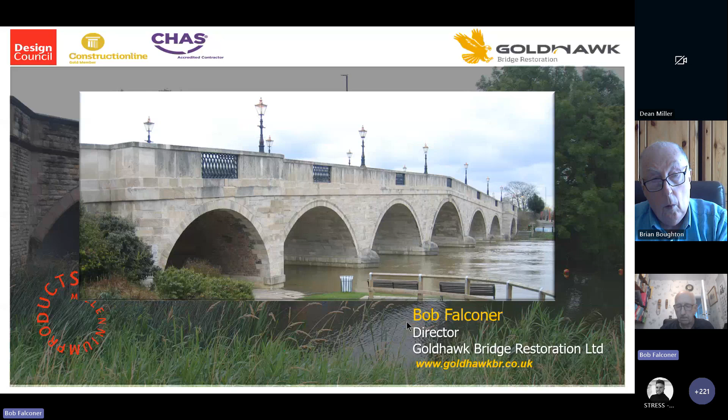Masonry arches, everybody seems to like them. They appear in paintings, they're aesthetically acceptable. A lot of them have never had any maintenance in their life, and they're still standing, durable, tolerant of deformation, built with local labour and local materials. They're part of our heritage. So they must be the ultimate in sustainability. Unlike concrete and steel bridges, they don't require any maintenance, and I think they should be preserved.

This is one of the first bridges we strengthened in 1997. You can see the MARS system in the bridge there, and it's still the same today, no maintenance, hasn't had any work done on it. This is another one - we were in Chelmsford fairly recently and took a picture of this. This is a viaduct that was done in the year 2000 using the MARS system, and again, it hasn't been touched, and it's still as good today as when it was first installed.

A little bit of background. The MARS system has been installed for over 26 years now, and we haven't had any problems. But Goldhawk itself was originally allied to Helifix. We started with Helifix as a partner, and business was good. But Helifix were taken over. We called ourselves Goldhawk because we had a meeting in the pub in Goldhawk Road, and that led to the name of the company.

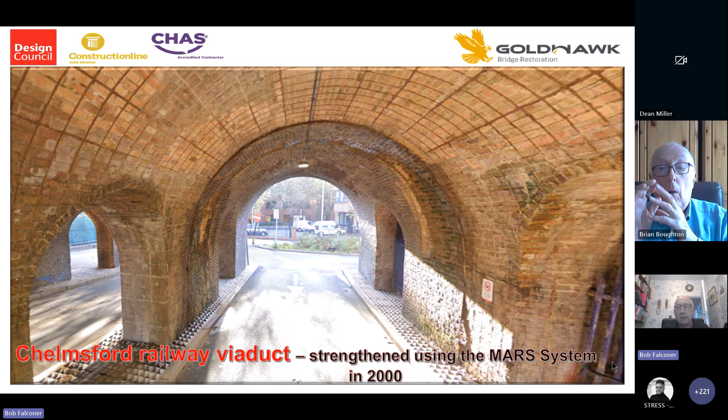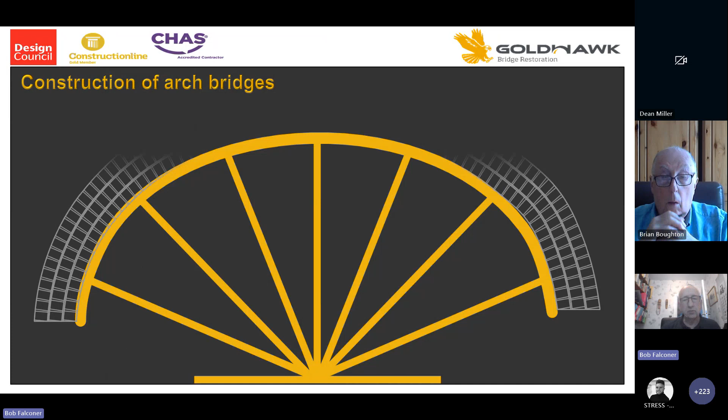Then after that happens, you put the fill over, which increases the compression in the barrel and builds your spandrel walls. So when the centering is removed, each ring goes into compression, but that only works for what we call rowlock construction, which is shown there. Bonded construction is slightly different and behaves differently.

Stone barrels, or ashlar or whatever, behave differently again - they don't exhibit ring separation the same way. Random rubble barrels are a different kettle of fish altogether. So the assessment codes treat all types of construction the same, and I do think a bit more research needs to be done on how the different types of barrel respond.

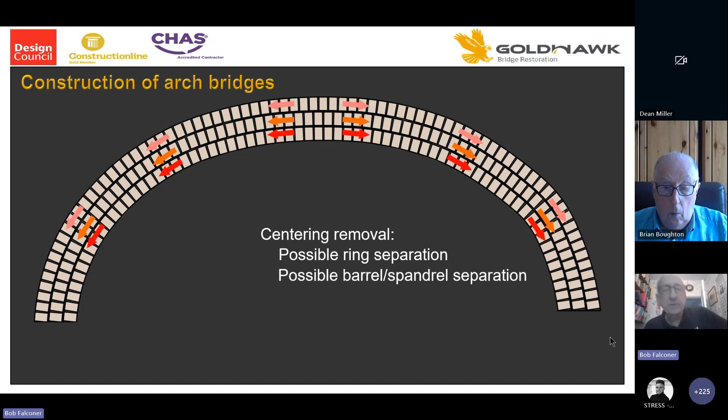A lot of academics will try to tell you that masonry arch bridges are 3D structures and should be analysed as such, but they actually rarely act as 3D structures. They comprise elements that tend to act against each other. You've got your spandrel parapet walls - they've got a stiff vertical plane, but they lack stiffness in the lateral plane.

The barrel itself acts like a jelly mold in the horizontal plane as loads go over it, and in 90% of cases we see a crack going around the barrel. It will depend on whether the spandrels have been thickened as they go down, as to the position of the crack. 90% of the time we see that.

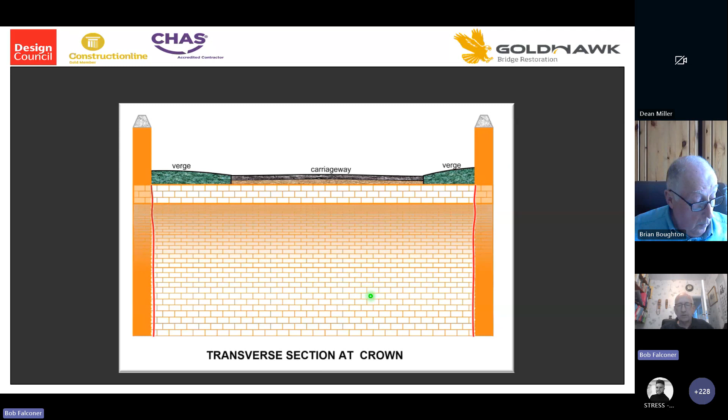The fill and the traffic loading provide horizontal lateral thrust against the spandrel walls, and you get cases where these push out under the wall. So it's the sort of competing elements within the same structure, and that's why 90% of the time we see these cracks.

This is a bridge we're doing in India at the moment, in the Gondal region - Sarda Bridge. You can see it's a beautiful bridge, but the parapet walls have got no real stiffness in them, and very low spandrel walls, and this arch is fairly flexible. It moves up and down, so only lightweight traffic uses the bridge at the moment. The spandrels can move with the barrel, so you don't get cracking in the barrel as normal. But that's sort of fairly unusual.

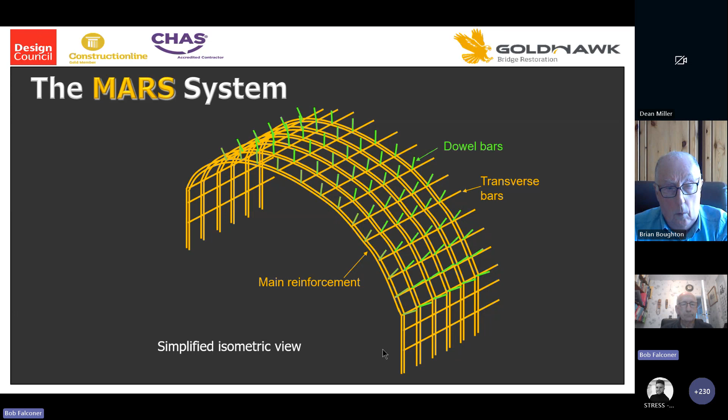This is the Mars system. We stick that into the underside of the bridge. We don't need to work from the top of the bridge or close the road or anything like that - we stick the MARS system into the underside of the bridge. This is what it looks like as an installation.

The circumferential bars around the barrel strengthen the barrel, and the transverse bars hold the parapet and the spandrel walls together, so they're effectively in tension. We tend to have a bar at right angles just to stop overturning of the parapet - sort of belt and braces. So that's the Mars system as it looks.

I should say at this point that I just don't believe in inserting steel bars into masonry. The Mars system isn't really like that - this is supposed to be a solution to ring separation.

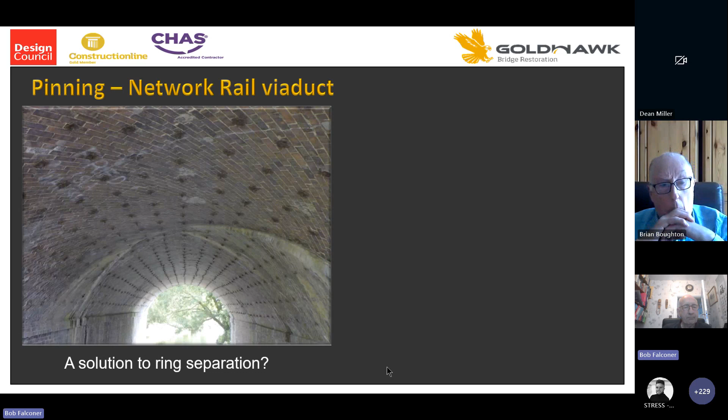I sometimes wonder about ring separation because, again, I've had experience where you bang the soffit with a metal hammer - some people will say oh yeah, there's ring separation there, other people say no, I don't think so. So it's a bit of a black art, I think, finding out where the ring separation is.

But in masonry arches, as the masonry moves, you get micro cracking around large bars, and in this case some of them were dropping out. They don't prevent cracking in any shape or form - they still allow cracking to take place. It's just not a good detail at all, as far as I can see.

This is a bridge that we've been asked to strengthen - another case where large diameter bars have been put into masonry, and again in this case all it's done is exacerbate other cracks. It's very difficult to drill them all the way through the barrel accurately, but in this case that's what it needed. So these bars have really made the situation worse, if you like.

We only use 6mm bars. In fact, using HeliBars, the effective diameter is only about 4mm, so they've still got that flexibility you need in masonry bridges. We put them in what we call Marflex, which always remains slightly flexible. In some cases we use 8mm bars - I'll come to that later, but I think that's the maximum you can use in a masonry bridge.

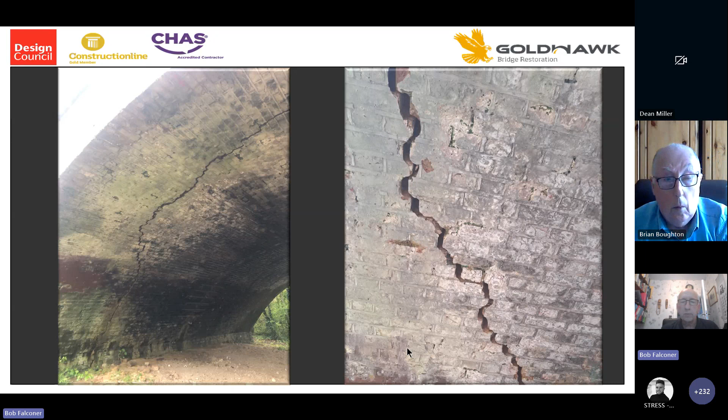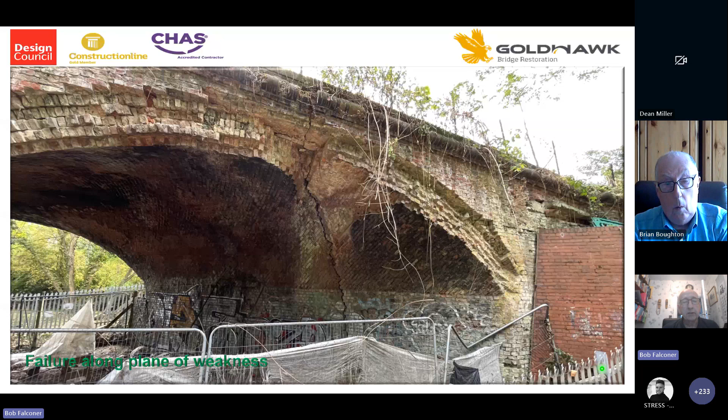So, let's get to the theory of how the Mars system works. The Transport Research Laboratory tested a number of redundant masonry bridges, giving a quantitative illustration of how masonry bridges perform.

As opposed to laboratory models, I'm not a great believer in laboratory models, to be honest.

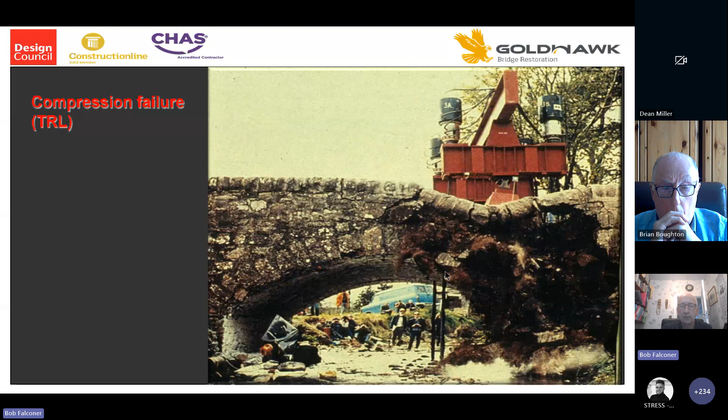This one shows the common four-hinge method of failure, with a hinge forming there, and so on. There's another example done on a sort of rubble bridge, and rubble bridges tend to fail in compression. So those are the two different types of failure for masonry bridges.

I've built a number of finite element models. The package at the university was only elastic, so we'd build the model, take away the elements that were overstressed, and rerun it until we got equilibrium. I've done well over 100 finite element models, and that just shows you where the hinges are going to occur.

So we get to the Mars system — how does that work? We have an arch barrel. As we increase the load, a hinge forms usually under the load. As we increase the load further, another hinge occurs at D. Increase it further, a hinge acts at B. And then, increasing further still, you get four hinges and the arch collapses — so it's a four-hinge mechanism collapse.

So what we do is strengthen the arch barrel at C, say, by putting reinforcement in there — that stops that hinge occurring. If you stop that hinge, you stop the hinge at D, you stop the hinge at B, you stop the hinge at A. You'll never stop them completely, since it will still eventually fail, but at a much higher load. That's how the Mars system works.

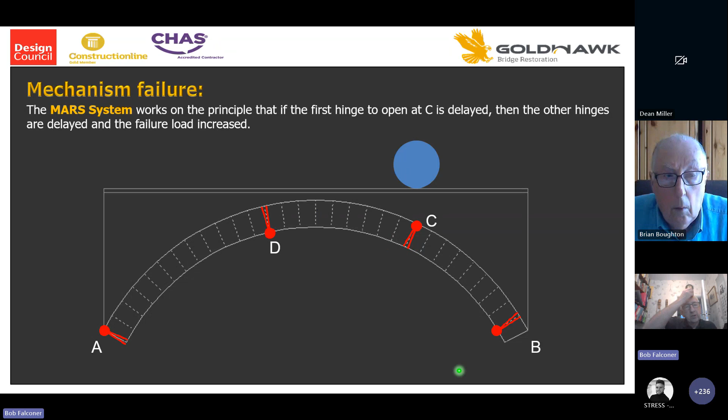We delay the hinge at C, requiring a higher load to form it there, and then the other hinges don't form — that's how the Mars system works.

The only problem is we don't know where these hinges are going to occur. It depends on the direction of the load, the profile, etc. You can only work it out by calculation.

So what we do is put reinforcement in around the whole of the barrel to cover any possible position for this hinge at C. The problem is, if we just put bars in the bottom ring, we strengthen that ring compared to the others, and a stiffer ring will attract all the load. In some cases you can actually weaken the bridge just by putting in a single ring, because the bottom ring might buckle under the increasing thrust.

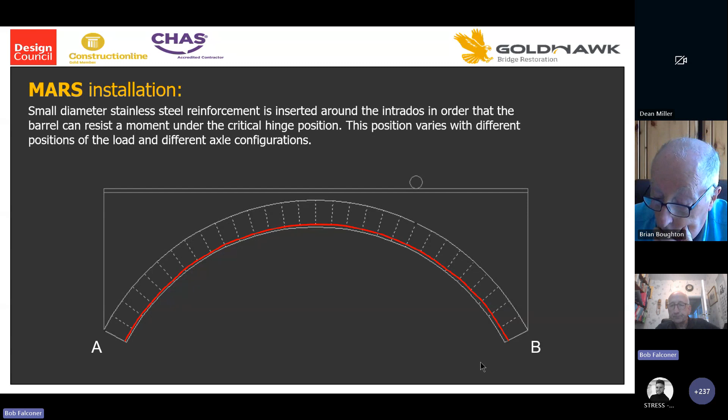So we put in radial pins, which tie all the rings together, and also tie the circumferential reinforcement to the barrel. The pins don't penetrate the barrel, so any services in the road aren't affected, and we can work from underneath the barrel.

That's the cross section of a typical installation — Helibars, radial pins, these are the circumferential bars, this is a transverse bar, and the Marflex, which has been developed especially for us.

It's amazing stuff — it sticks to anything. In load tests we've done, it's the brickwork around the Marflex that fails, not the bond. So it can be applied in damp or dry conditions and it still works exactly the same.

It's a derivative of a material that's been used for 100 years in bridge expansion joints, so it's salt proof — and that's important, because stainless steel is affected by salt. The chromium oxide layer of the stainless steel is affected by salt, and you could get rusting if you expose it to salt water that percolates through road bridges from road salts, etc.

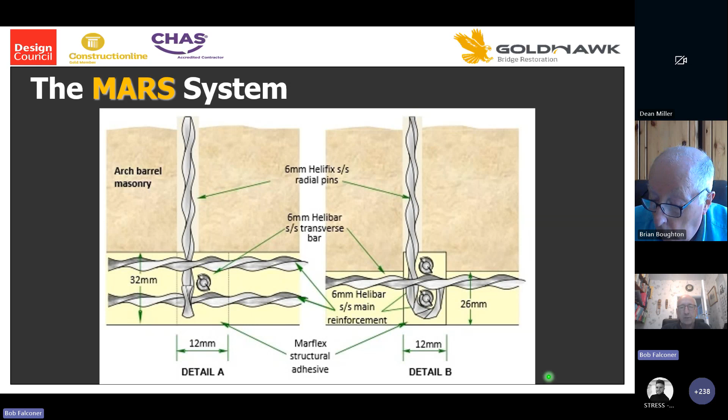So that's how the Mars system works.

The ASARC program, and the Mars program is based on the ASARC program — exactly the same — was tested by ARP independently, and found that of all the methods and programs available, it was the most accurate, best fit to the test data of any method used. That test data came from the actual bridges tested by TRL.

This is a test we did at TRL, an independent test carried out at the Transport Research Laboratory. It was a 5-meter span arch with 3 rings, and they put sand between the rings to simulate ring separation.

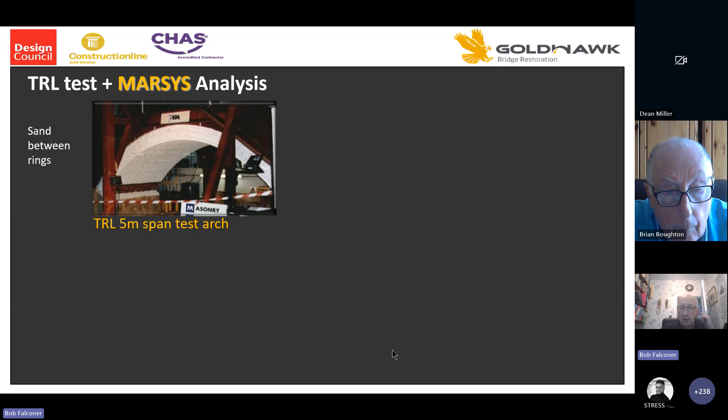This was the test at failure, showing the MARS system in the bridge and the failure test. The unreinforced bridge, with ring separation, took 200 kilonewtons. I worked out using MARSYS that it would take 190, giving us a 7.5 ton weight restriction for a bridge like that, a 5-meter span bridge.

For the test, they tested the unreinforced barrel to failure, but not to destruction, only to maximum load. So we jacked it back into shape and put in just a layer in the inner ring, with surface steel only, and got an increase in strength of about 30-odd percent. That was just to see what one ring of reinforcement would do.

Then we rebuilt the bridge and put in the full MARS system. I predicted this in front of an audience of 60 bridge engineers at Transport Research Laboratory, making sure there was no fiddling. I sat down on my laptop using MARSYS and predicted it would fail at 349 kilonewtons. I designed enough reinforcement to take it up to 40 tons. We could have put in more reinforcement and got higher failure loads, but we wanted to see how accurate the software was.

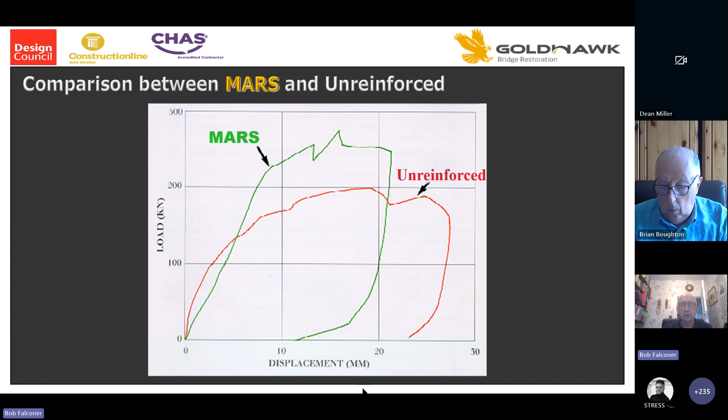All the students at the university, all my master's students, were given dissertations on masonry bridges, and there was no shortage of them coming forward to do this. We had a rig in the lab with glass sides, so we could plot the original arch and then plot how it was deforming. We looked at various forms of construction, various types of fill, etc. I don't really believe laboratory models can accurately represent 100-year-old bridges, but they're useful in comparing different properties and improving what works and what doesn't.

So that's a bit more experience of masonry bridges. We've tested masonry bridges, and we've tested lots of bridges with weighbridge testing vehicles. We used to use these, though we don't do it as much now, with cast iron weights on the back, so you know exactly what the wheel load or axle load is on the vehicle. We can go from tare up to, say, 25% greater than the design load using these vehicles.

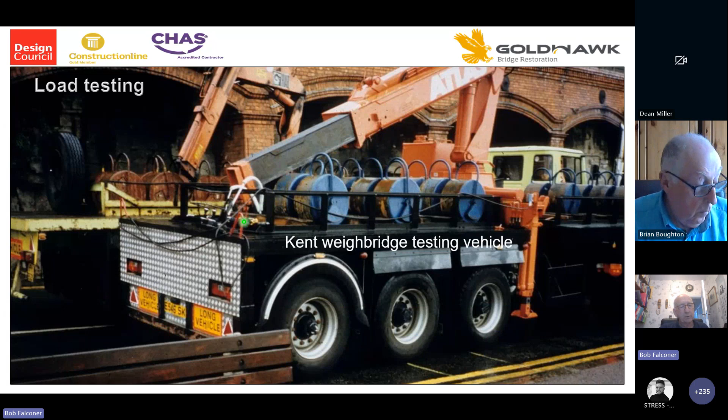We use vibrating wire gauges, and this was really just to look at dispersion and see what the effective width was. It actually showed that the codes were pretty good.

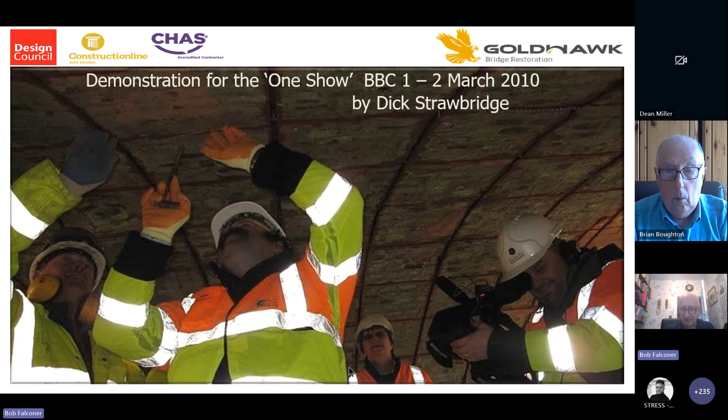The MARS system was demonstrated on The One Show in 2010. Dick Strawbridge came down to a job we were doing, and it was actually performed by the engineer for Gloucestershire. She recommended it to the BBC, and he came down and demonstrated it for television. So that's our claim to fame.

That's us standing there - this is me. I'm the good-looking one on Dick's left.

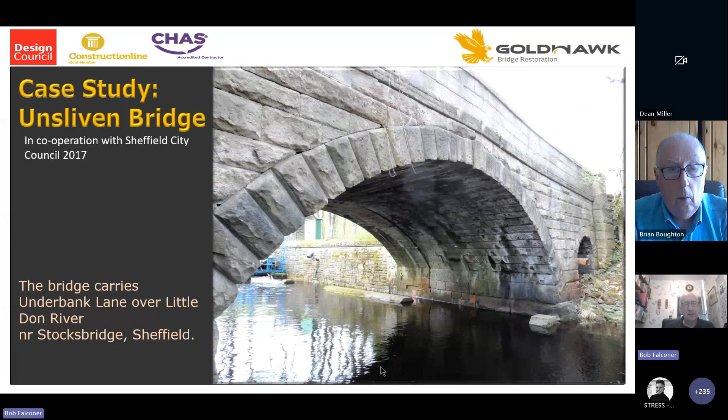So we get to case studies. This is one I did in Sheffield in 2017. It was built in three different sections - there's the original section, then it was extended on either side, widening the sections.

They were going to knock it down and put a concrete monstrosity in its place, which is not environmentally friendly or anything like that. So the locals were up in arms about this and wanted to keep the bridge.

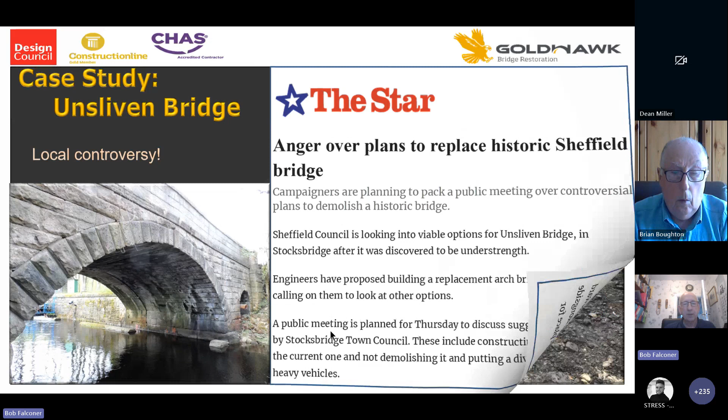So we were called in to preserve the bridge. When we got there, the contractor had already taken the fill off the bridge, so that's what it looked like - three sections, with a middle section being the original, and the extensions either side. You can see how rough the outside was, while the inside, the intrados of the bridge, was nice and neat.

But the extrados is rough. You can see if you wanted to core the barrel to find out the thickness, if you take a core through the bit that sticks out, you get a completely different value than if you take a core through the bit that doesn't stick out. So you get two different thicknesses. With stone barrels, you need to be very careful when you're taking cores.

I think you should never take the thickness at the elevation as the thickness of the barrel, because very often they either thickened them at the elevation and didn't put as much material in the actual barrel that's carrying the road, or they tried to make it look more elegant and make it thicker on the road.

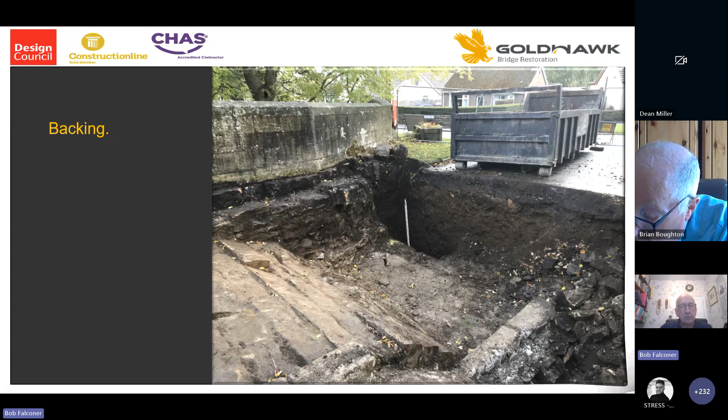And this is, I think, a big no-no. You never put a concrete slab over a bridge. We've had cases - we remember one bridge in London where a slab had been put over the bridge and was acting as a seesaw. So the wheel came on one side, the other side came up, etc. A bit daft. In this case, instead of having a separate axle load there and an axle load there, etc.

It's concentrating the whole bogie load at the crown of the arch, there's no dispersion down from the arch barrel from the slab. So there's no dispersion away. It's concentrating the load on the slab, and it always seems to be a bit of a daft idea to me. But anyway, that's the slabs.

This is - you can see the other side. The fill is completely different. It's just a load of rocks, etc. So fill - it's always difficult to predict the properties of fill.

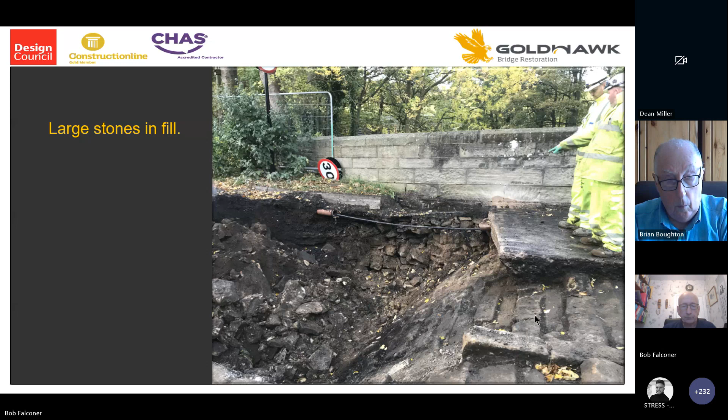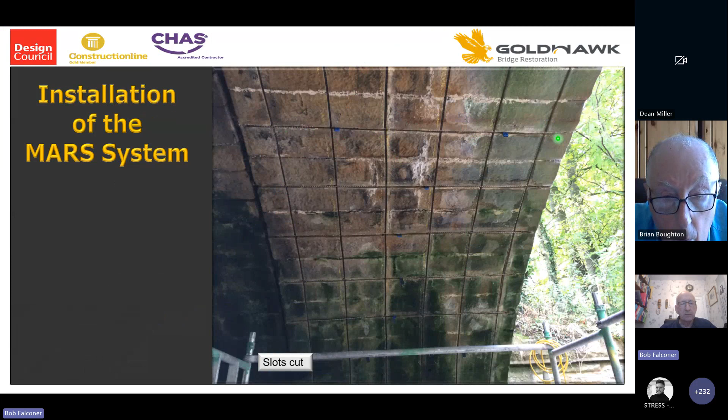This is our access to the bridge. You can see it's fairly sophisticated, and that's the working platform. That's the slots being cut to put the MARS system in. The Marflex isn't in place yet, but the bars seem to be in place there. And that's the MARS system in place.

So you can see it's very difficult to actually see what we've done - it makes it a neat job. I'm not a believer in taking the bars between different sections, because they've got different stiffnesses and behave differently, and I like to maintain the original response of the bridge to allow it to move in the way it was originally built.

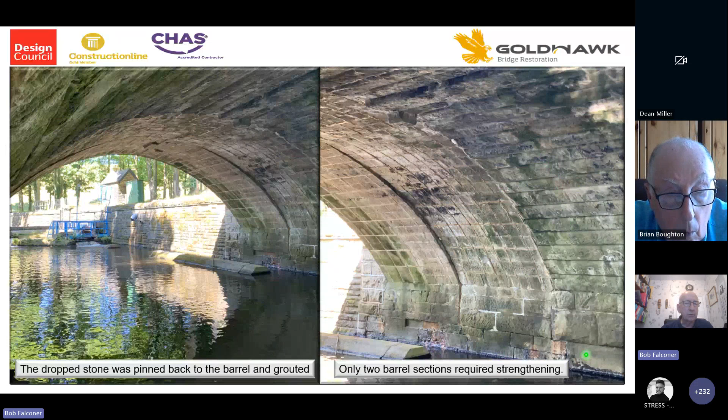This section doesn't need strengthening, so the end section didn't need strengthening. This is the MARS system in the bridge - we didn't need to put it in that section. The middle section was the section that needed the most reinforcement, and we only put in nominal reinforcement. This is a nominal system there.

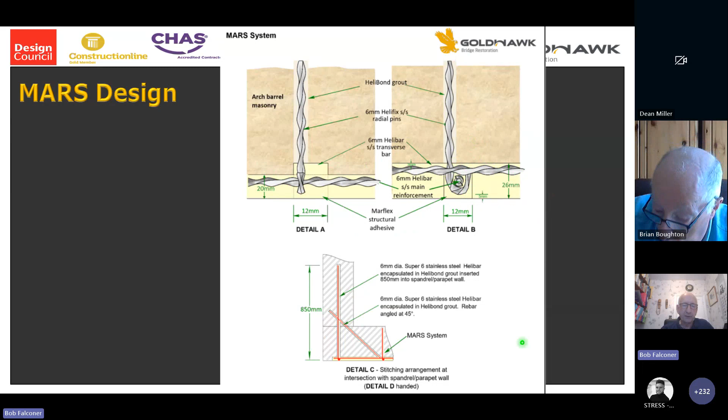It's just one bar transversely and one bar circumferentially at 450 centres. So that's our system in that bridge.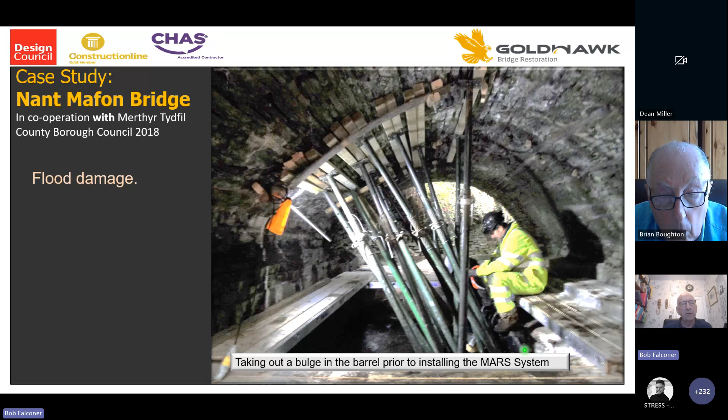This is another bridge in South Wales. It suffered from serious flood damage - it was buckled, in poor state. So we pushed, as we did in the laboratory for our test bridge, we pushed the barrel back to maintain its profile.

In order to do that, we had to excavate, which is not really a good idea, but we had to excavate over the barrel. I found a big lump of concrete in there, which was causing the bulge in the barrel. So you never know what you're going to find - you get old pipes, you get boots, you get all sorts of things in the fill, sometimes used as skips, I think, when they were open.

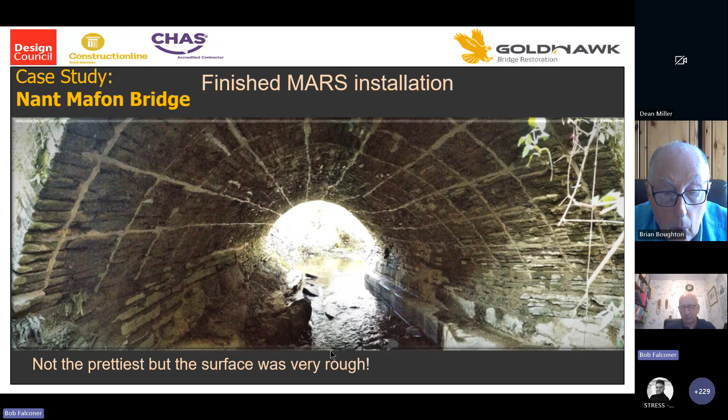And that's the system put in the bridge. It's a way out in the country. It doesn't look very nice, it's not pretty, but it preserved the bridge, which was good.

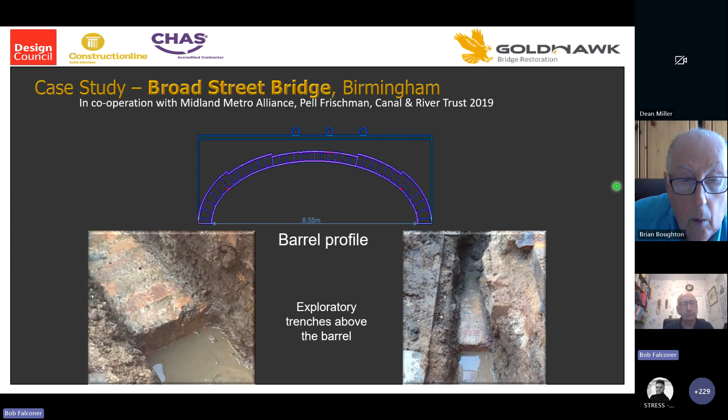There's another bridge that Brunel designed or built, I don't know. It's near Reading on the Great Western Railway, called Briscoe's Bridge, constructed just before he died. So I can say I've designed something that's improved on Brunel's work - feather in my little cap.

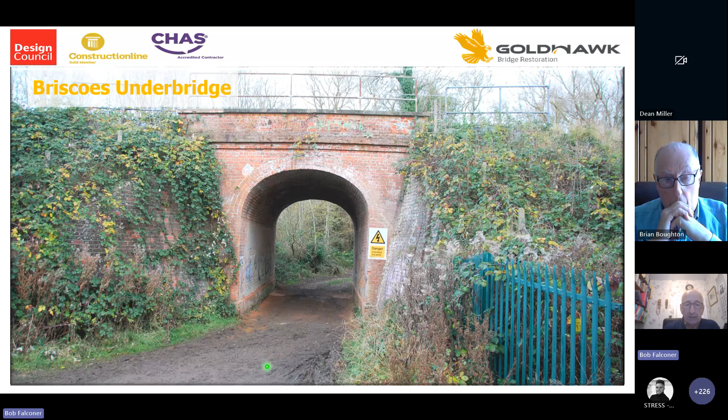I always find it's a good idea to just have a pole, stick it under the bridge when something's going over the top - it gives you a feeling for the response of the bridge. I didn't realise I was quite so bold, to be honest, until I saw that picture, which is a bit of a shock. But with the aggregate trains going over this, you got 10mm deflection.

They were huge trains, and bits were dropping out, and it was quite frightening standing underneath this bridge watching it go up and down. As each bogie went over, it acted perfectly elastically - it went down 10mm, back up, down 10mm, back up as the train moved slowly over the bridge. So it was a very interesting exercise.

The bridge wasn't actually elliptical, it was 3-centered, which are quite common because it's a lot easier to set out a 3-centered arch. You've got a circle there, and then a circle between them.

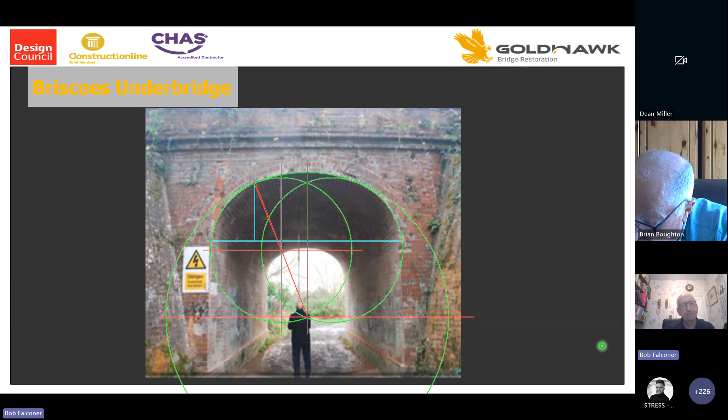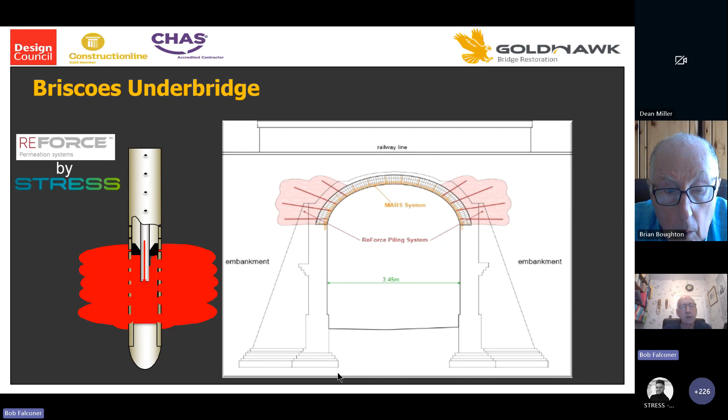So we designed a system - we replaced the backing by putting in, because our sister company Stress does a ReForce system for reinforcing foundations, so that pumps out a very controlled amount of material. We could not afford to let any of the grout go into the ballast supporting the railway line, because they have to keep reballasting, etc., so we couldn't affect the ballast. This gave us a very controlled flow - we knew exactly what we were putting and exactly where we were putting it, and that improved the backing to the arch, to the barrel.

We then inserted our MARS system. Now, propping - normally we don't have propping.

Normally, because I design the temporary condition, I check the strength of the arch for the slots being cut. Since they're only very small slots, transverse slots 12 mil by 26 mil deep, it's just a small loss of mortar. So I normally check that to make sure the bridge doesn't need a weight restriction, or doesn't reduce significantly in capacity, to make it unsafe for us to work there.

But on this bridge, we worked with Arcadis, and they designed the props for us, using soft propping because we don't want hard spots. That's a 25 mil deep rubber pad, and we work between the props. Because of the deflection of the bridge as the train was going over at 11 o'clock every morning, we were quite grateful for the props, to be honest, but we don't normally recommend them.

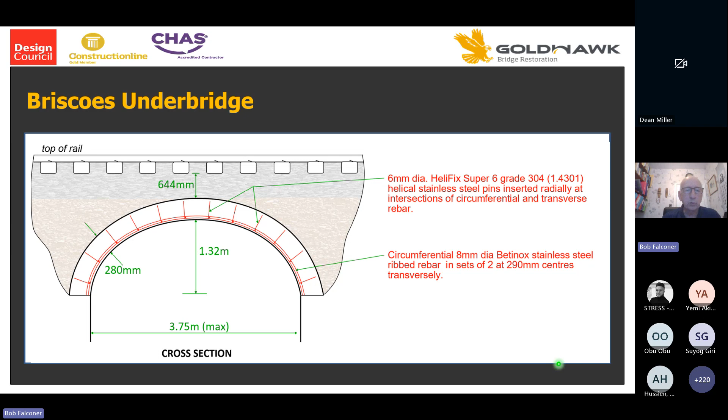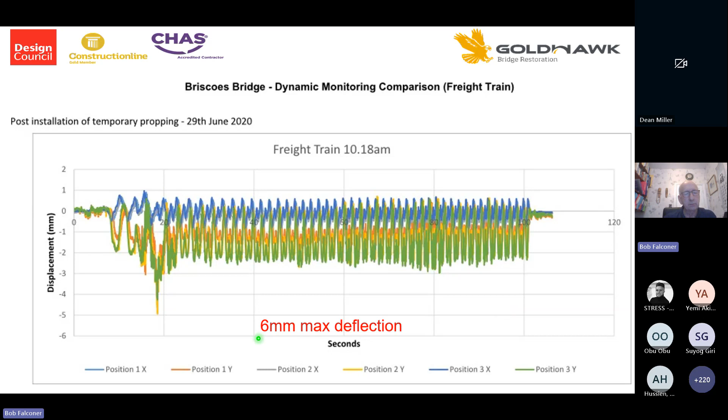When the props were put in, it reduced the deflection from 10 mil to 6 mil, so that was the effect of the props. Then, backing into the arch again, replacing the backing which had fallen away, reduced the deflection to 3.5 mil, which shows you the effect of that.

Then putting in our MARS system - you can see that's the engine going over, and this is the wagons - reduced the deflection to 1.25mm. I think I'd calculated it should be 2.

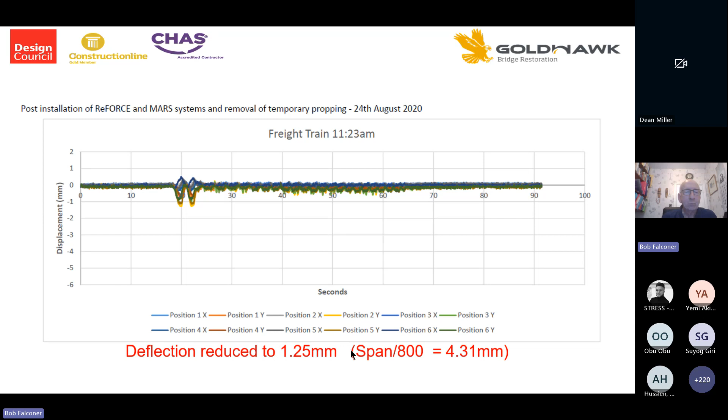Anyway, so I'd calculated that it was going to be about 2 millimeters or something, but we achieved what we wanted in the bridge using the system. This is a system in the bridge, and it gives people confidence that we've strengthened the bridge. It doesn't deflect as much, and it looks good.

So the arch was upgraded from RA5 to RA10, completed the job on time, and they didn't have to close the railway line or anything, because the alternative was to rebuild this bridge, which would have meant closing a very busy railway line. We refurbished the brickwork, redid the brickwork, etc. So the bridge is back to normal.

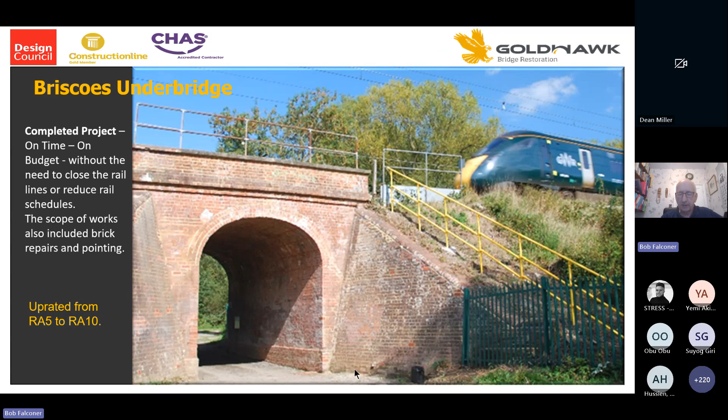Another job we're working on at the moment, we're actually installing our system as we speak. This is in Cardiff. Again, working with Arcadis and Amey and Amco Giffen, same people, but Transport for Wales in this case.

The barrel of the bridge was 700 mil thick. It had a brick layer over the top, so obviously it had all been taken away and the brick layers put in, and lean mix concrete put in under the ballast, or the ballast put over, I should say.

The original assessment took the full width of the bridge, 960 millimeters I think it was, which was not correct, because as we've seen earlier, when you remove the centering, the barrel sinks and it all goes into compression. The brick layer hasn't had a chance to sink because it's been built over the barrel, so there's no compression in that brick layer. So it's not actually doing anything.

So I don't know why I put that in there in the first place. The lean mix was all cracking up because there was water pouring through the barrel, not really being much use whatsoever.

So we put our Mars system in the barrel, again using 8 millimeter bars to improve the stiffness, and that's the system. We've had to recase.

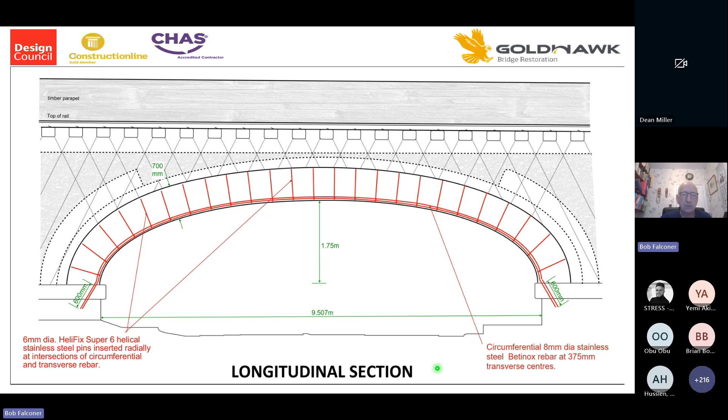I'm just not a fan of recasing masonry bridges because, again, you're putting bricks in that have no stress in them. But we've had to recase some of it, so we're anchoring our bars in there, because you can't anchor it in bricks that don't have any stress in them. And that's what it looks like.

Again, they've designed propping for us, but normally, in this case, I don't think we need it, to be honest, because it's fairly lightweight loading.

Although after we designed the Mars system, Transport for Wales came along and said, actually, we want RA8 because we've got tamper vehicles going over this. So if the tamper vehicles were going at 5 miles an hour, we calculated it could take them, and they were RA8 levels, but we had to upgrade it to RA6, which was good. We don't know what the original was - I think it was RA0 actually - we got to in the end because it was overestimated in the first place.

Another thing, please don't do. There's a lot of standard Network Rail standard details that I don't agree with, but this is the natural crack that goes around the spandrel walls, and these people wanted to stitch it, and all that will do is move the crack from there to there eventually, and it won't do any good whatsoever. So there's a number of Network Rail standard details that I have issue with, I must admit. So please don't do that.

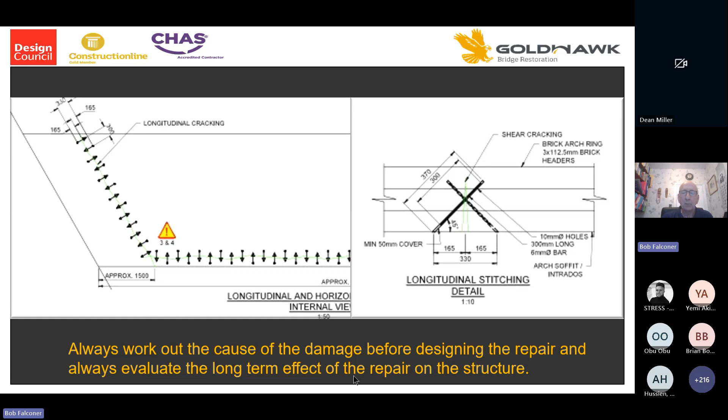I think when you're designing a repair for any structure really, you need to work out the cause of the damage first, what's causing the cracks, etc., before you start thinking about repairs.

This is another beautiful bridge that we did, over the River Nene in Oundle in Northamptonshire. First records in the 14th century, and then it was destroyed by floods, rebuilt, widened, etc. So in that case, we've got lots of different foundation types, lots of different arch types, etc. It comprises 13 spans from 3.5 meters to 6.2 meters, and they wanted a weight restriction from 3 tons to 44 tons and SV100 vehicles.

So we came on site, but in January 2020 there were massive floods, so the whole site was flooded out. You can see the bridge there. There's a backwater that goes up the side of the bridge and completely flooded it. This was taken by one of our guys in an airplane flying over.

As soon as the floods went and we were able to start working, COVID came along, and so we still carried on working. We had very strict site rules. We had air-fed helmets for each of our operatives, and they worked alone. All site rules were really strict - only one person in the canteen at a time, everybody had to have their own cutlery, everything was kept separate, and everybody had to have their own cars to get to site, etc. But we did it.

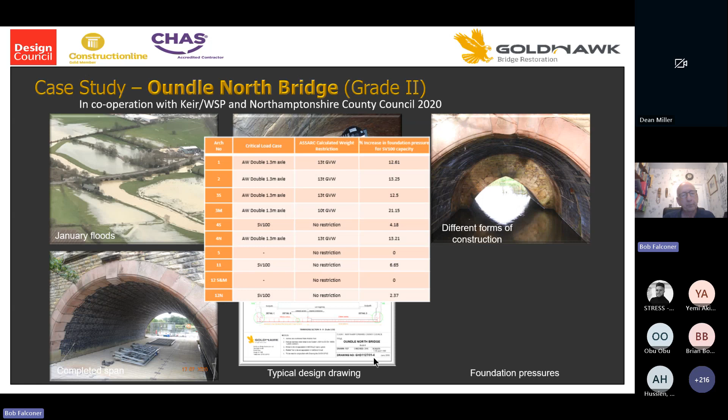When you're upgrading from 3 tons to 44 tons, you need to be aware of the increase in foundation pressures across all the different foundations - there's foundations in the middle of the bridge, south side of the bridge, etc. We reckon that because the foundations have been in place for 100 years and have consolidated the ground underneath, you can increase the foundation loading by 15%, say, and there's no problem. In this case, we had 21% as one of the foundation increases. So we recommend that for principal inspections, you do just have a look at the pier just to see if there's any movement.

So that's the bridge - you can see the Marflex system looks really good in there. We can colour the Marflex to suit the colour of the brickwork, etc., and repaired a lot of the stonework as well. Our guys have done a brilliant job, I think, on that bridge. That's the system in place again, and again it's brand new, so it's very shiny, etc. But that's our system.

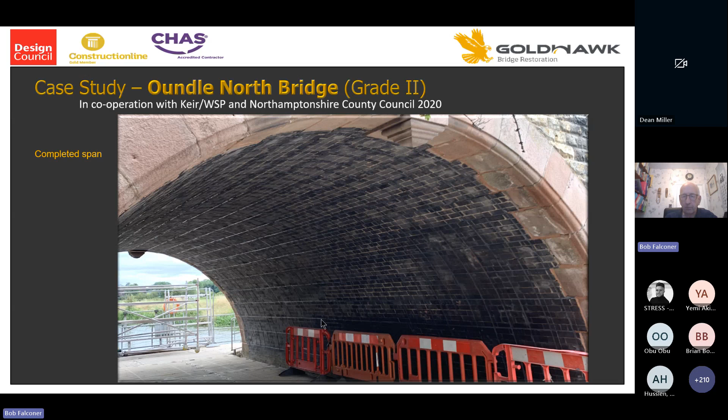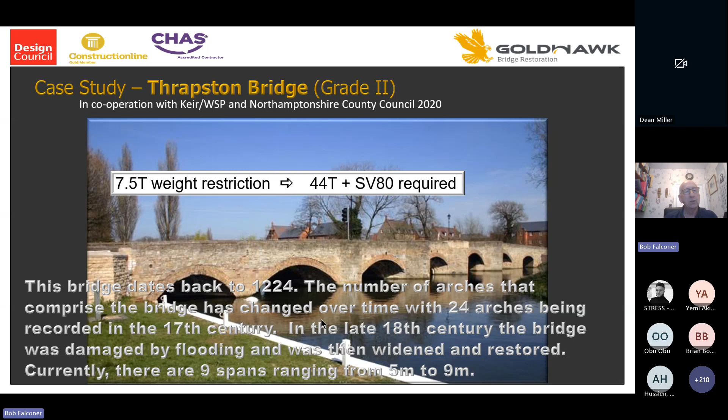This is another bridge we did, Thrapston Bridge, again over the River Nene, same people. Another absolutely fabulous bridge, love to look at it. It dates back to the 13th century, and it started off with 24 spans - now there's only 9 spans, ranging from 5 meters to 9 meters. It had a 7.5 ton weight restriction with single lane working, and again they wanted it upgraded to 44 tons plus SV80.

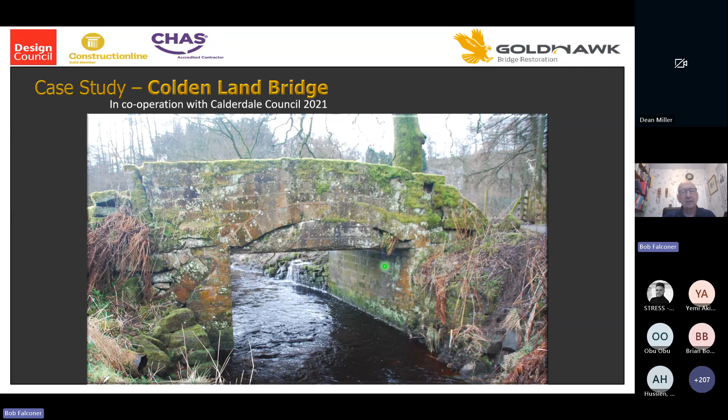Of all these large bridges that we work on, I like working on these little ones just as much. This was a little bridge in Calderdale that had been strengthened by just putting concrete underneath on wrought iron beams, and it was in a terrible state, as you can see.

So the bridge had this support added, and the abutments had also had new abutments added under the arch here. So you can see there's a huge restriction to floodwater, etc., and it was in a bit of a state.

So the idea was to cut away this, but we didn't want to remove these because that would be too much. So the way we looked at the arch, there's the inserted abutment here, and as the barrel deflected, it would come away from the abutment here, and you'd get a pivot point here.

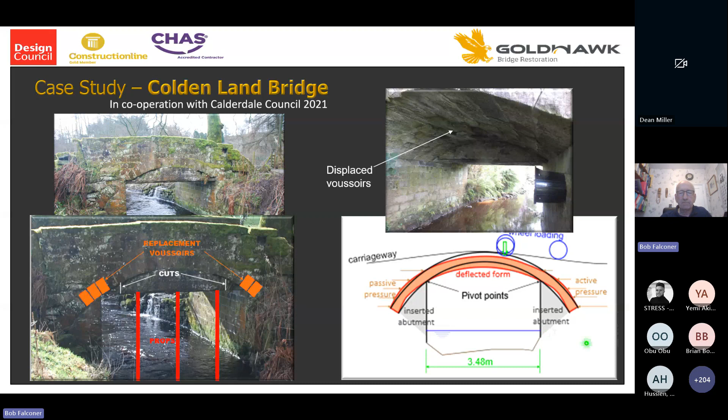So we designed a system where we anchored the barrel to the back of the abutment, took our mast system around the abutment, and made it all as one, if you see what I mean.

And so that's the state of the barrel before we started. It was in a very poor state.

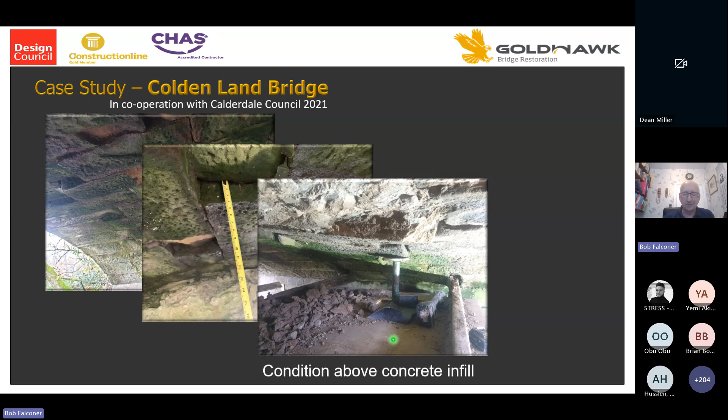You can see a 40mm displacement between the stones, and this was the wrought iron tray that was holding the concrete. You can see why that was put in there, because it was in a terrible state, and the wrought iron was actually corroding, so it was about to fall down anyway.

And there's a big heavy plant just next to the bridge which was using it. So our guys worked their magic, and this is the end result.

You can see the mast system in place, a huge aperture now for floodwater to get through. Because there wasn't much fill over the top of this bridge, they jacked all the stones back up into place, and it's back to normal again, this bridge. So I thought that was a great success for us.

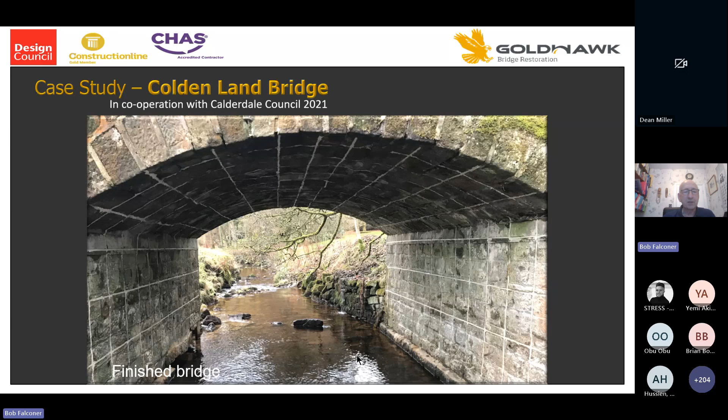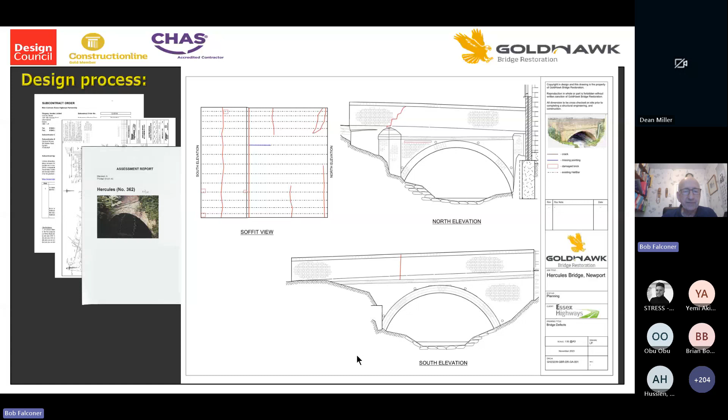Now the design process - as I'm the design guy for the mast system - we get an order normally, then we usually get a few drawings of the bridge, previous assessments if possible, and normally we go out and monitor, mark up the defects for ourselves and check dimensions, etc.

I need lots and lots of photographs because very often I don't get to the bridge. You can see this one - I don't know if you can see it - but this is bonded construction, this barrel. And the other side is rowlock construction, which is bricks on edge.

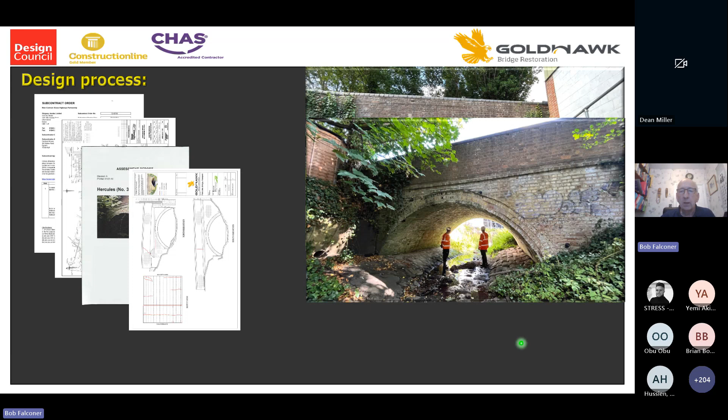you can see that you can get some fairly big lorries on this bridge. So it was all useful information.

The design process is that we need technical approval first, so we come up with an AIP, an approval in principle form, and that gets approved by the technical authority.

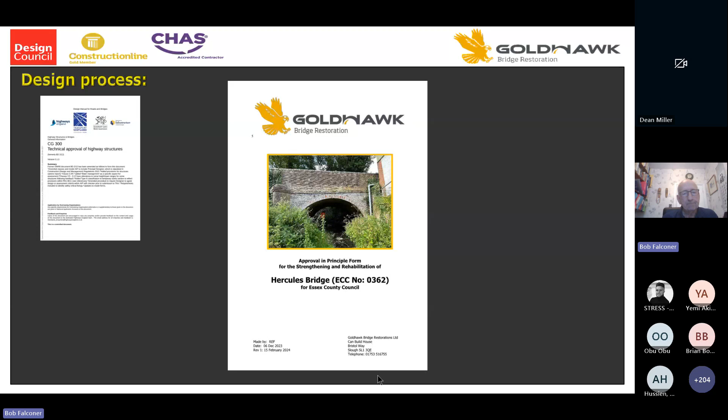Sometimes they come back to us with queries, and then we have to answer them, because it's about deciding on what materials and dimensions to use, and agreeing that between all of us.

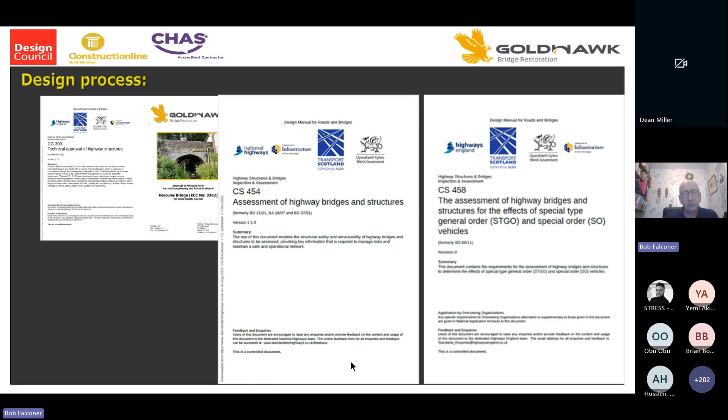Then we design to 454 and 458. 454 is for normal all-assessment live loading, and special vehicle loading is 458. Public roads are supposed to take a minimum of SV80 vehicles, so we have to design for that for most public roads.

We also use CD 376, which is a design code for unreinforced masonry bridges. It's not strictly relevant to us, but there's a lot of good information in there that we tend to use, such as that you shouldn't use LM loading, which is given in the Eurocodes for masonry arches.

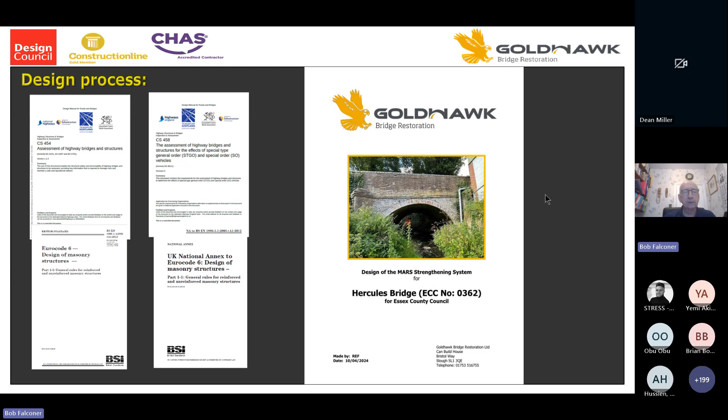So we design to these codes and then design the reinforcement to Eurocode 6, because I think that's about the only design code for reinforcement these days - that's rules for reinforced masonry in structures. I then come up with a design report that goes for approval, and then we agree costs, agree site layout, etc., and go on.

So I use the ASAP program to analyze the bridge for pre-design. That gives profiles, etc., of the arch. Then I use MARS to work out the moment of resistance that we need, and then design the reinforcement to the Eurocode.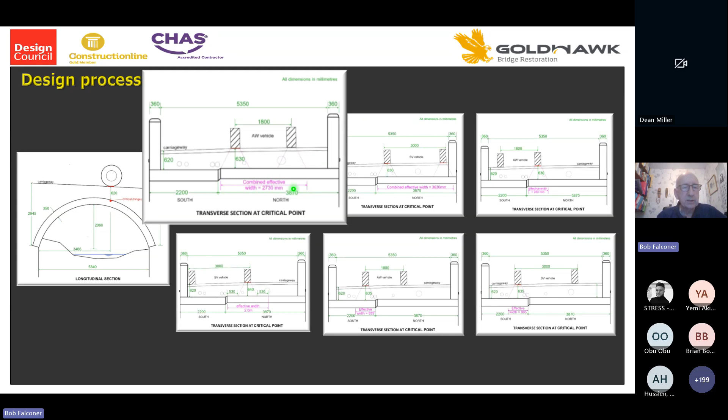Now, in this particular bridge, it was in two halves, so you have to be very careful about your effective width and your loading. For instance, this half could actually take authorized weight vehicles, but if you put it up against the edge of the slab, the vehicle's got to be in the middle of your effective width, so your effective width is that length there - it's not as in the code.

With SV vehicles, again the effective width - they just fit on the slab, and your combined effective width is that amount. But when you load the other slab, you can't get a vehicle on it, so one of the wheels has to go on this slab, and really the wheel has to be in the middle of the effective width. So your effective width really is only the dispersed width of the wheel.

Same with SV vehicles, out of sequence - the effective width there, you can take 2L or something as extra width, so the effective width is 2 meters in this case. The vehicle is straddling one slab and the other, so that's the loading on this slab, and again the effective width gives you the intensity of loading that we need to design for.

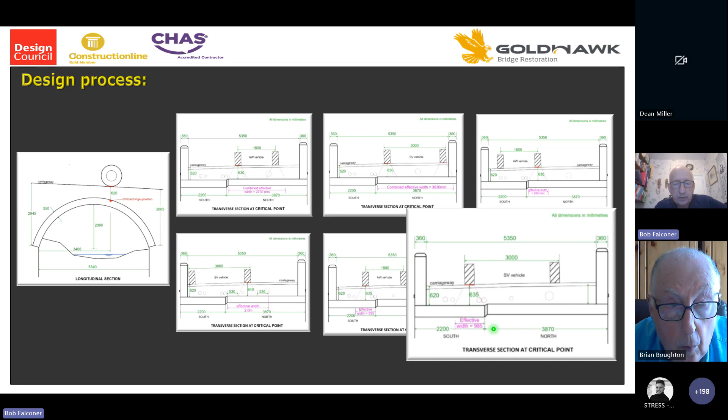You can see there's lots of services in this bridge, but our MARS system doesn't affect services. So we designed our MARS system for each half of the bridge. From that loading, you can see there's different spacing of the bars, etc., but we don't affect the services that go over the bridge.

Another bridge that we did in Wales was strengthened using Armco and concrete over, and there was lots and lots of flooding at the time - all the local shops were flooded out. So we took all that away, put in our MAR system, and we haven't had any reports of flooding ever since.

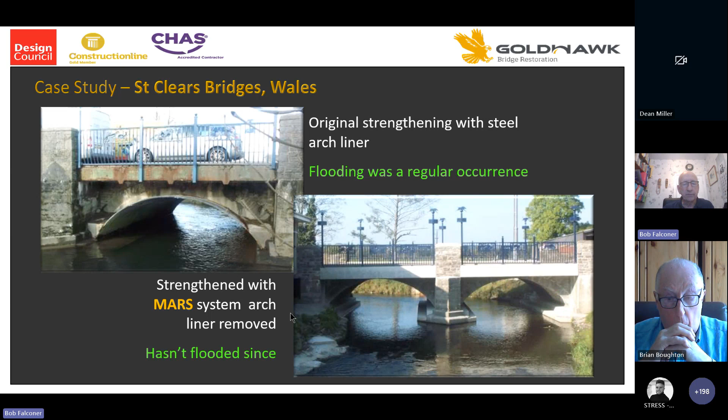This is a bridge that we thought was in Turkey, but it was actually in North Iran. It's supposed to be the biggest bridge in the world. We didn't install the system ourselves - we trained the guys in this country, it was a UK contractor. So this is the system in place in Iran.

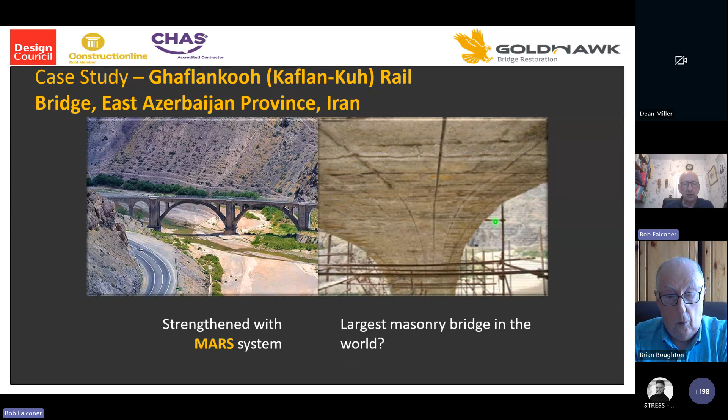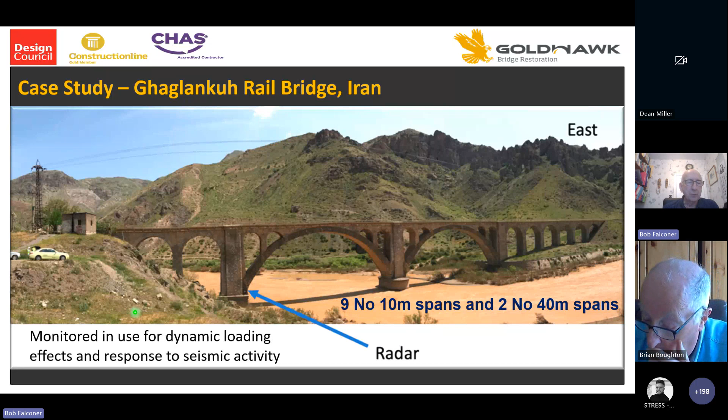To show the environmental aspects of the MAR system, I'm nearly finished. Looking at this horrendous practice of infilling masonry bridges, which I think is shocking - in order to infill, you've got to quarry the material, you have massive lorries coming through country lanes dumping it, you need plant on site to distribute the material, and then you're using concrete, which isn't environmentally friendly anyway, and you're destroying the biodiversity under the bridge. Use the MAR system instead.

Our Marflex is manufactured in Tyne and Wear, Helibar is manufactured in North Wales, and we're in London, and our guys tend to come from the Midlands. We only use small vans, so there's no great big lorries being transported.

We use hand tools that we can hire from local hire shops, so we're improving their business. We just need a simple platform or whatever, which we get from the local scaffolder. The big thing against strengthening bridges is having to close the bridge and use traffic diversions, and that uses up loads of energy, etc. So we avoid that.

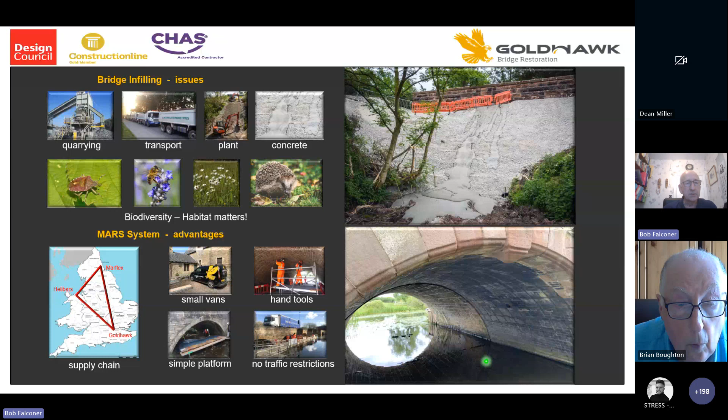This is the bridge infill. They put grass over the concrete, but you still have a void under the bridge which you can't get to inspect, and so that can deteriorate, and you could end up with a big hole in the road. Whereas that was the original bridge, it was a beautiful bridge. Installing the infill was reportedly 123k.

The MAR system comes with everything taken into place. I don't know how much that includes, but our total would be 86,000 to put it in. There's been such an outcry against it that they've had to remove it, and the cost of removing is 400k. So, a bit of a waste of money.

In conclusion, the MARS system won the Millennium Award for Innovation. It was displayed on the Spiral of Innovation at the Millennium Dome, which is not there anymore, which is a shame, but it was displayed as the very best in British ingenuity. Brian and I had to go up to meet Tony Blair to be presented with a Millennium Award at the Dome, which was an experience.

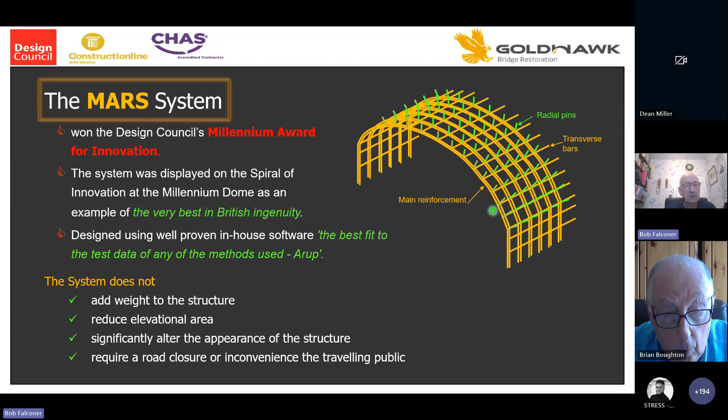It's designed using our in-house, well-proven software. It's the best fit to test data of any of the methods used. It doesn't add weight to the structure, doesn't reduce elevational area for flooding, etc. It doesn't significantly alter the appearance of the structure, it makes it better, and doesn't require a road closure or inconvenience the travelling public.

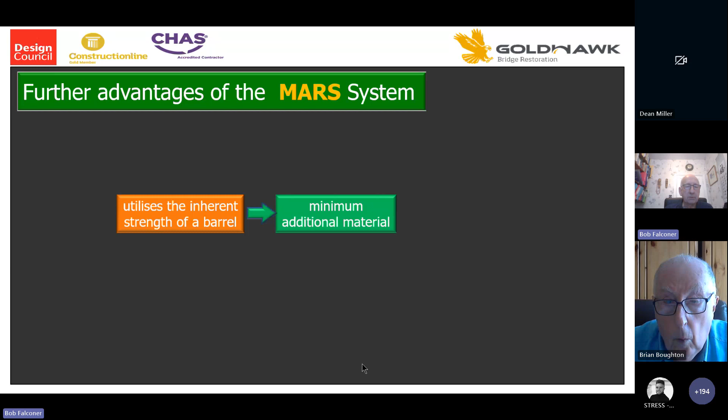Further advantages: we utilise the inherent strength of the barrel, so we only add minimum material. If you're putting in saddling or whatever, you're actually adding a lot more extra material. Using minimum material is good for the environment, preserves the flexibility of masonry arches, and slightly improves the structural behaviour and elastic response.

Alterations to statutory undertakings, you can hardly see this, but there's lots of services in there, and the barrel is the thick shaded line underneath. That was on one of the busiest junctions in the UK, and we didn't have to have any road closures when we put the MARS system in. So alterations to statutory undertakings, etc., are not required.

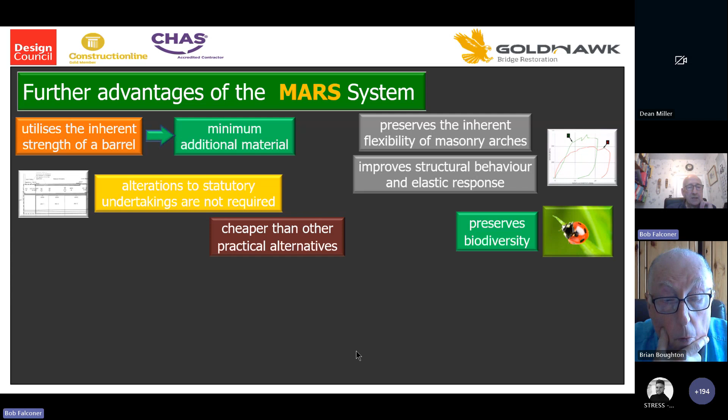It preserves biodiversity because fish can swim around our scaffold poles, etc., in the river. It's cheaper than other practical alternatives. It's easily inspected and repaired, although we don't have to do that. It cures and prevents ring separation, which some academics say is the principal mode of failure under cyclic loading of masonry bridges, but I'm yet to be convinced. Anyway, it does that.

No road or rail closures required. Inert, durable materials, because the Marflex is all inert materials that last for years. And operations can be planned sequentially.

This was a railway bridge. We only had a few hours on a Saturday night, each Saturday night. I think it took about 10 weeks, I can't remember, and Brian knows more. But we put it on a scaffold platform and worked from that, and then at the end of the working period we just stored it at the side of the bridge, continued to use the bridge, and came back next Saturday night to carry on working. So we can plan operations sequentially, and this is the most environmentally friendly method of masonry arch rehabilitation.

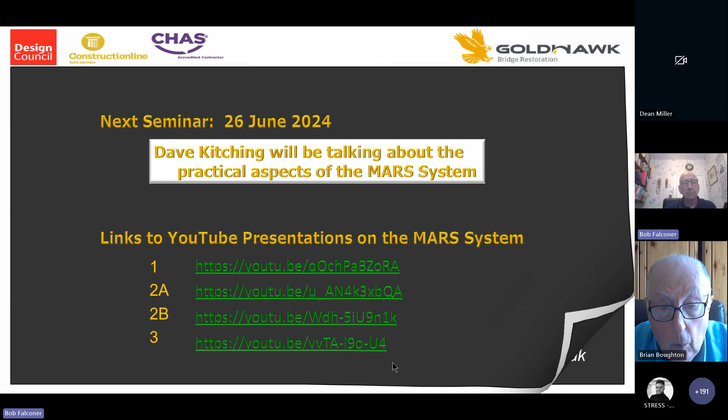But anyway, thank you for listening, and that's me finished.

Quarter of an hour. Bob, yep, during the course of your talk several questions flashed onto the screen. We had one from Gordon about whether the road can remain open, which I think you've answered. We had one from Melissa about propping, whether that's required and when. And we had one from Helen about the lifespan of the system. Well, the lifespan...

There were others, but I didn't manage to get them recorded down. We've only used the propping on those two rail bridges, and I don't think we needed it on the second one. The first one, we didn't actually need it, but it was nice to have it, if you see what I mean.

But road bridges and things like that, we've never used propping. We used inert materials, stainless steel, which is protected against the environment, so it should last the lifetime of the bridge. So I reckon 120 years is not a problem. We've looked at ones that are 20 odd years old and no deterioration whatsoever. So there's no reason why it can't last forever, I think. But I'm biased.

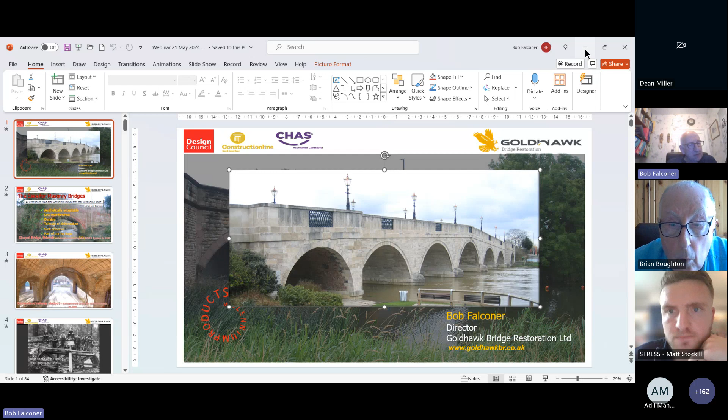We are looking at ways of repointing, but it's always because we need the lever arm in the barrel, so we need to have our bars as near the surface as possible to give us the maximum lever arm for the strength. And we are looking at ways of maybe repointing with some sort of epoxy mortar, but that's an additional expense, and most clients are very happy with the MARS system as it is.

Without repointing, how do you provide the bond between the existing barrel and the MARS system? Yeah, well, that's it. We either have to do it while the Marflex is still wet, or we have been looking at an epoxy mortar, just experimenting with it, just to see the effect, because it would only be about 2 millimeters thick, and that would just drop out if we just use normal mortar.